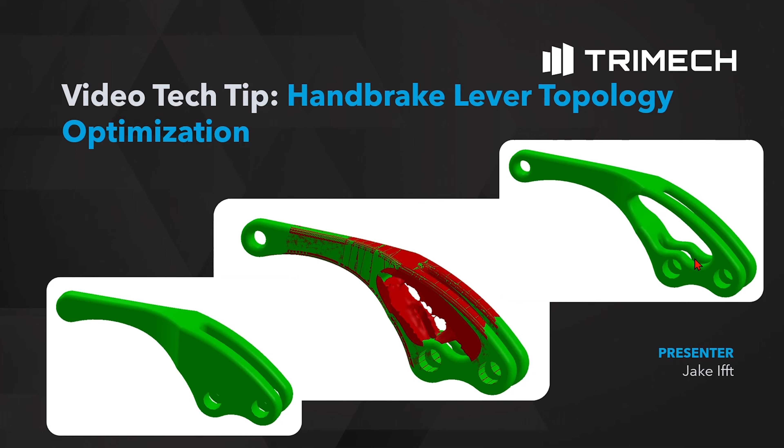So this was the initial stress test of the initial object. I found that it was around 50 megapascals max stress, and the yield strength of the material is much higher than that, about 620 megapascals.

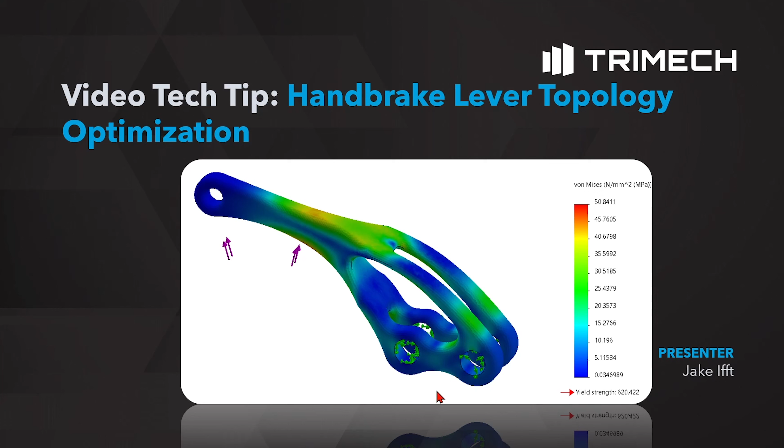This is after the lightweight procedure. When it went from 230 grams to 147 grams, we saw about 50 megapascals still as the max stress. So even though we made it that much lighter, we didn't see much of or any of a decrease in strength really. And this is just an overview of that process.

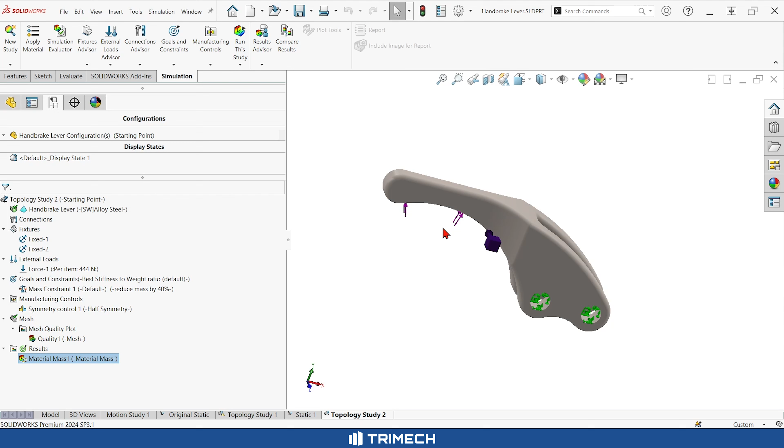The actual topology study takes a little bit of time to run, but let's say you have your model. You start a new study inside SolidWorks and use a topology study, and I made one like this. I assumed that people could probably only pick up with like 100 pounds of force, so like 444 newtons. I figured that's a pretty strong person.

And the results it gives us show just how much material we have to have there to actually take this force. We can even change it. We can go all the way to the lightest stuff, all the bare minimum stuff that we would have to keep. And we could see that shape would be kind of hard to manufacture unless we're 3D printing or something. We can even smooth that out.

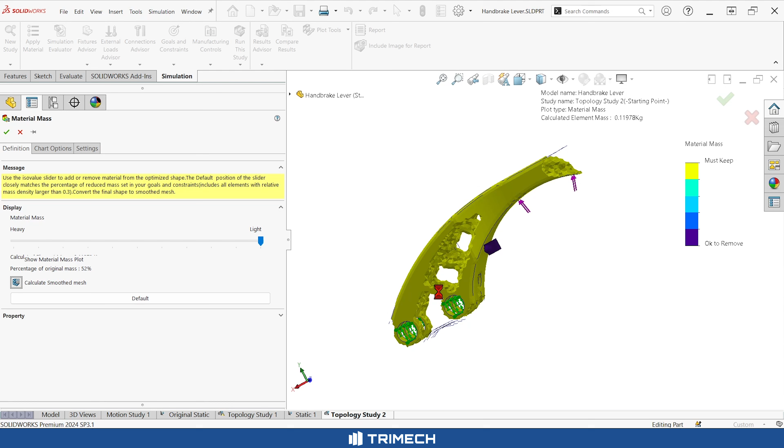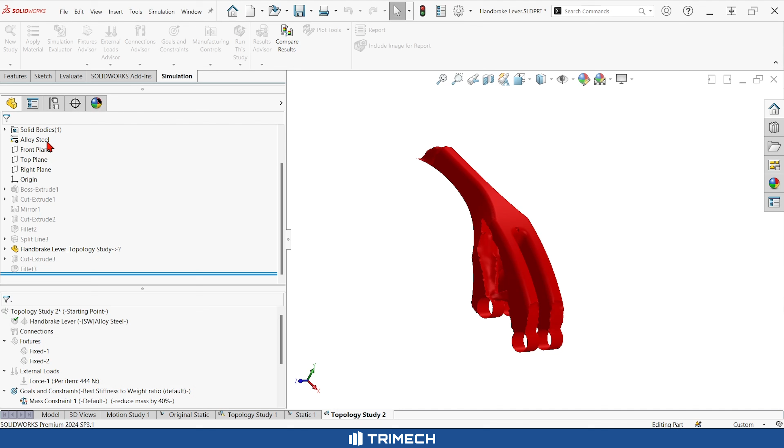And then after that, we can export it as a smooth mesh and re-import it into the part file like I did here, and I just put it as an inserted part with the same origin as the other part, so I could overlap them. In the lightweight version, I had both bodies turned on like this,

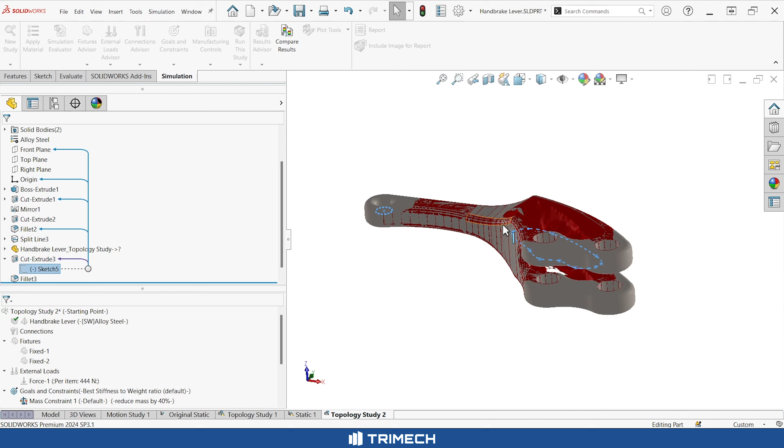and I sketched out a spline around the area that I thought I could remove the material thanks to the study. I feel like it's able to be machined still with something like this compared to what the study gave us. And it showed we didn't really need this end area at all, but just for human comfort, I left it and just put a hole in there.

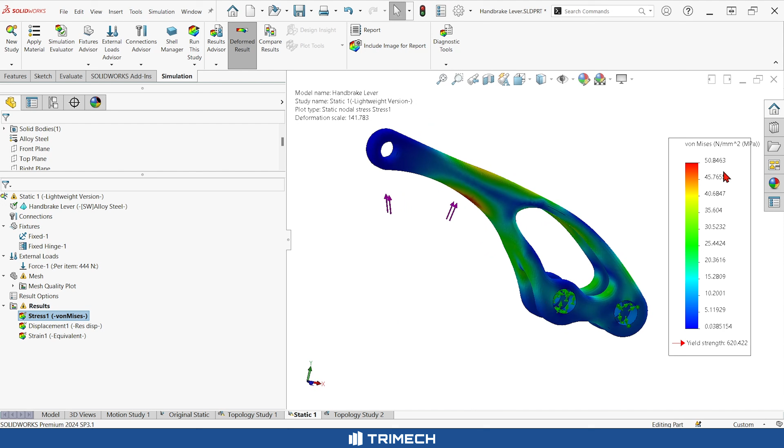Then after that lightweight procedure, just to make sure I didn't damage anything, I reran the original stress test with the new shape and found that we were still well below the yield strength of the material, and we were able to reduce it by that amount.